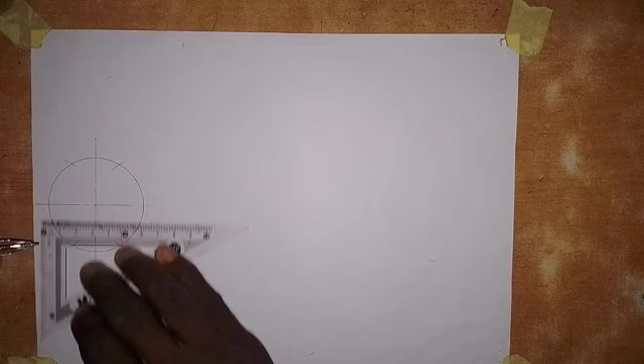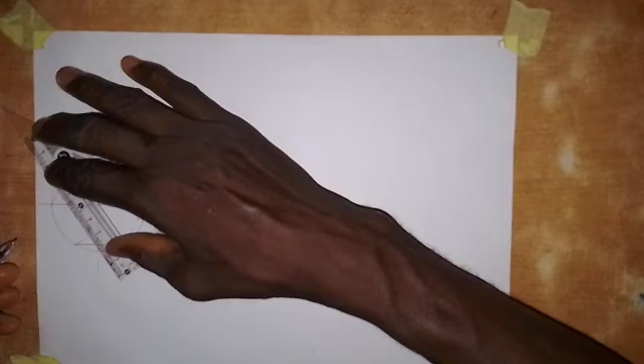Okay, so we join this point together, and we also join these 2 points together. So join this point together with this, and this point also we join them together. So join these 2 points together like this, and then these 2 points we join them together, and then we join these 2 points together like this.

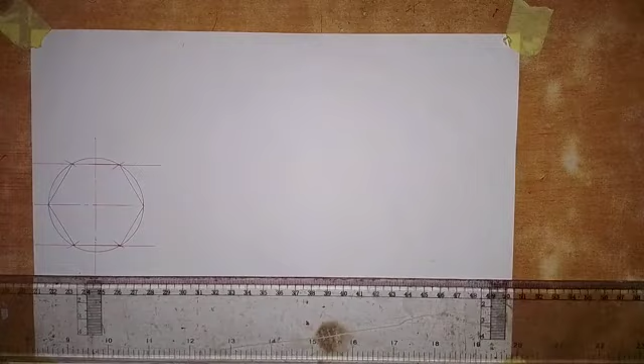Alright, so the next thing that we are going to do is to construct a square around this polygon. So to do that, we extend this line to both sides, and we also extend this line to both sides like this, and then we draw a vertical line through this point, and bring it to this side, and draw a vertical line through this corner of the hexagon. So we have this shape.

So what we are going to do now is construct a shape like this. So I'm going to label these points. This is point A. This point I will call point 1, and I'll call this point 2. This point I will call point B. This is point C here. This point I will call 3. This is 4, and this is 5. And then this point is point D, while this point I will call point 6.

Okay, so on the hexagon we have the numbers, while this may not be a square. I don't think it's a square. So we have it labeled ABCD. Next, we are going to construct a shape ABCD of this form, and we are drawing it in isometric. To do that, we are going to make use of our 30-degree set square. So we are constructing it on the 3 faces of an isometric figure.

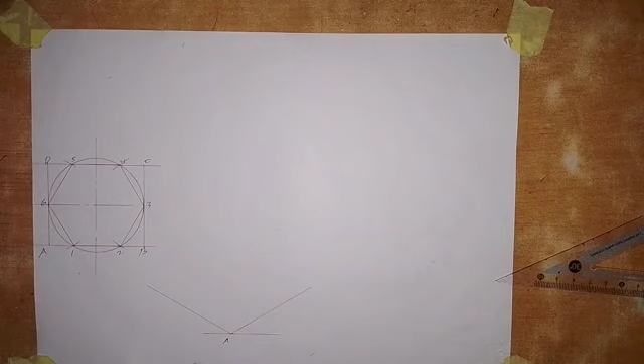Okay, so now I'm going to locate point D. So I will come onto this line. From here, use my compass to take this distance from here to point D. Taking this distance, I put it at point A, and then make an arc on this line like this. Okay, then taking distance from A to B, I put it at point A here and make an arc on this line.

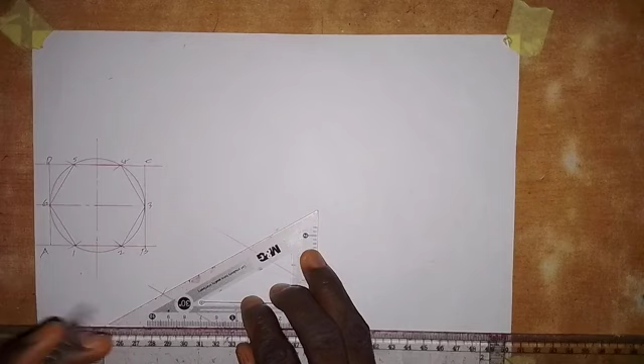Okay, so I need to extend this line, so we extend it here. And then the next thing that I'm going to do is draw a line from this point to this side, and then I will take it from this point here and draw a line from here to this point. All right, don't forget that this is point B, as we have it on this object, this is point D, while this point is point C. Okay, so that is what we have there.

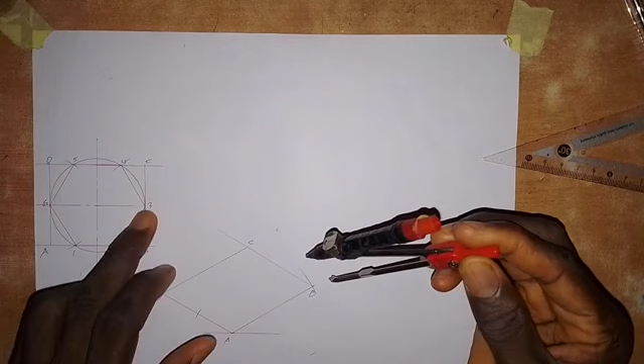So now we need to locate points 1, 2, 3, 4, 5, and 6 to construct an isometric hexagonal polygon. To locate point 6 and point 3, they are the same. All I have to do is take the distance from here to 6, put it at point A, and make an arc on this line. Then bring it to point B, because B to 3 is the same as A to 6, and make an arc here. So this is point 6, and this is point 3. Let's take note of that.

Then to locate points 1 and 2, I put the pinpoint at A, taking the distance of A from 1, and make an arc on this line. The distance of B from 2 is the same as A from 1, so I put it at point B and make an arc here. Also, the distance of C from 4 is the same, so I put it at C and make an arc. The same applies to D to 5, so I put it at D and make an arc at this point.

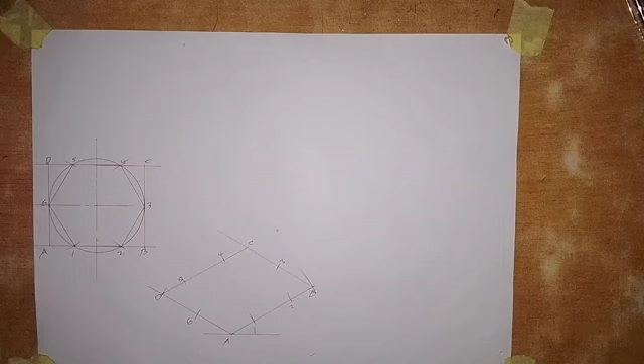So we have located these 6 points. This is point 1, point 2, point 3, point 4, and point 5, and we already have point 6. All we have to do now to produce an isometric hexagon is to join these points together. We are drawing this on the top face of an isometric object. So I will join 1 and 2 together like this, and then 2 and 3. This is going to form an isometric hexagonal polygon, drawn on the top face of an isometric block.

So if it happens to be an isometric block, we are going to draw it like this, as I've done it here. So we complete it now by joining point 5 and 6 together. So we have a hexagonal isometric plane figure now on the top face. Let's draw it on the left side face.

On the left side face, we are still making use of what we have done here. So on the left side face, we should be facing this side. What we have to do is to draw a vertical line. So we come to this side and draw a vertical line from this point, and then we turn it to this side. From any point here, turn it to this side, so we have this going in this direction. Okay, so we have it there.

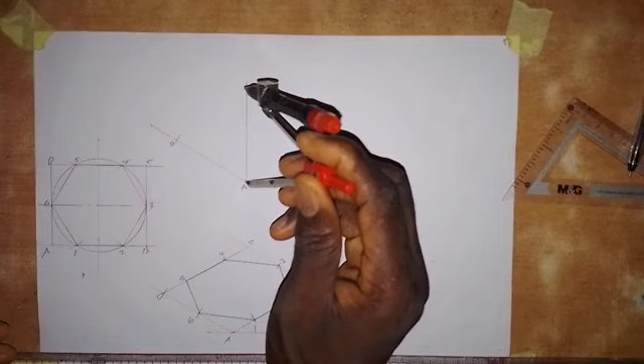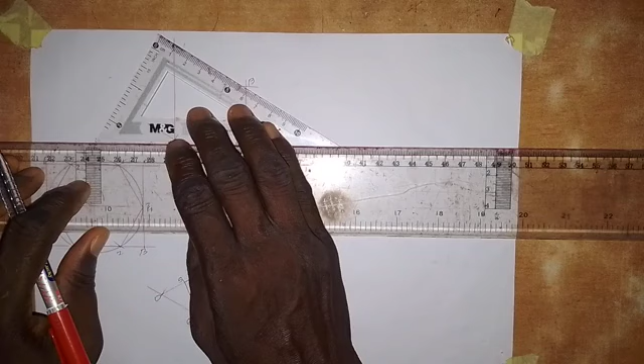Then we take distance AB to locate point B on this line, from A here. So this is point B; we write B here. Then with our 30-degree set square, to locate point C, we draw a vertical line from this point, and then we turn the set square like this, bringing it to point B. So take this point here. This point is point C now.

All right, so we now need to locate points 6, 1, 2, 3, 4, and 5. Point 6 is in between A and D. So just take this distance from A to 6, put the pinpoint at A, then make an arc. This point is point 6. And then point 3 from B is the same as that of 6 from A. So we put the pinpoint at B and draw an arc like this. This point is point 3.

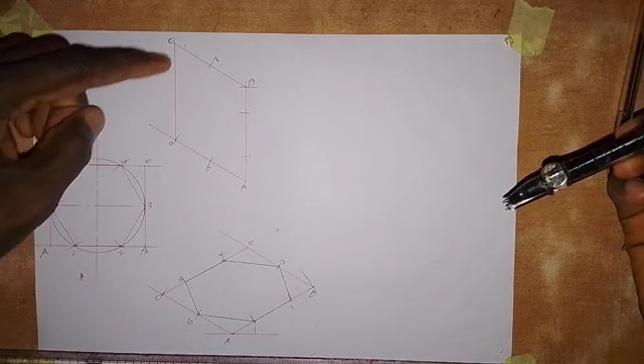Then we need to locate point 1. Take this distance A to 1, put it at A, and make an arc here. This is point 1. The distance of 1 from A is the same as distance of 2 from B, so put the pinpoint here and make an arc. And distance of 4 from C is the same as that of 5 from D, 1 from A and 2 from B. So put the pinpoint here, make an arc, and put it at D, and with the same radius make an arc. This is point 2, this is point 4, and this is point 5.

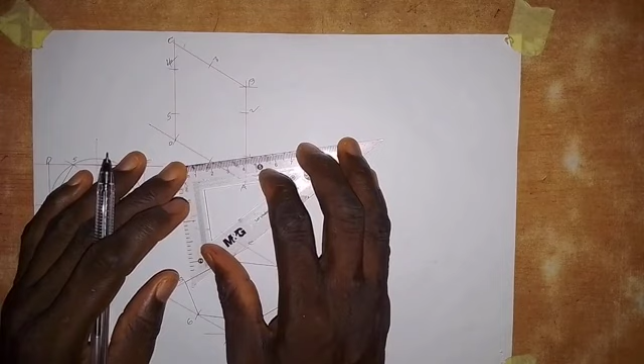So we just need to join these points together to get an isometric hexagon on this left face of an isometric object. We join these 2 points together, then we join point 2 and 3 together. Okay, so we have it like this.

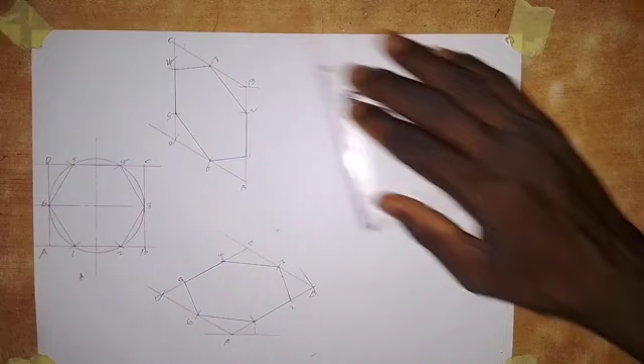Then join point 3 and 4 together. So we have this. Then we join point 4 and 5 together like this. And then we join point 5 and 6 together for us to have an isometric hexagon on this left face. So this is how we have it.

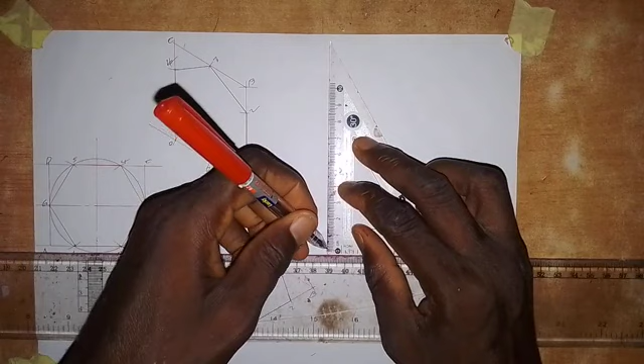Okay, let's look at that of the one on the right face of an isometric block. So we are going to produce it here. So what we have to do now is to come here. We first of all draw a vertical line. So here we have a vertical line. Then we turn the set square in this direction and we draw a line in this direction.

All right, so let's fix point A here. So here we have A at this point. Then we take a measurement of AD. For us to locate point D, we take this distance from here to here. We put it at point A here, then we make an arc on this line. So this is point D. Okay, so we have D at this point.

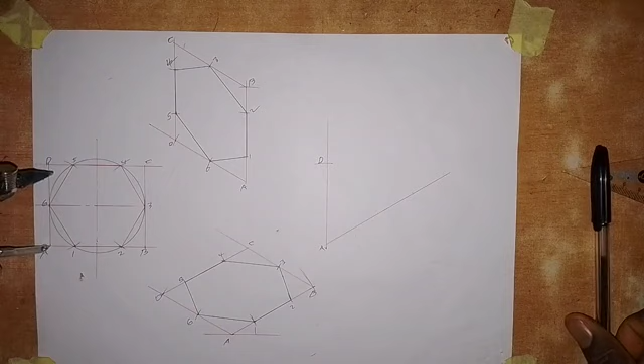Then we take distance of AB, so from here like this. Take this distance, put it at point A and make an arc here. So this is point B. Okay, so then we need to locate point C.

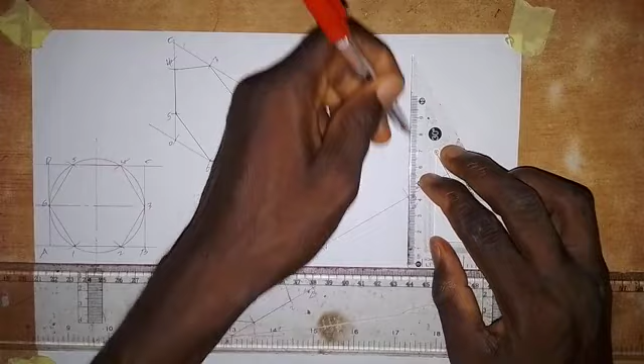For us to locate point C, we come to this point here and we draw a vertical line. We come to point B, we draw a vertical line here like this, and then we come to point D here. We set the set square in this direction, so we draw this line. So this point is point C.

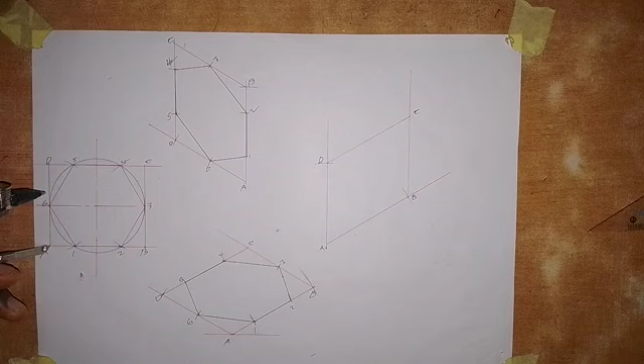So what we have to do now is to locate point 1, point 2, point 3, point 4, point 5, and point 6. And to do that, let's locate point 6 and point 3 first. Take distance A6 from here to here. Put it at point A here and make an arc here. So this point is point 6.

So here is point 6, and point 3 from B is also the same as point 6 from A. So with the same radius that we have used to get point 6, put it at point B here and you make an arc here on this line. So this is point 3.

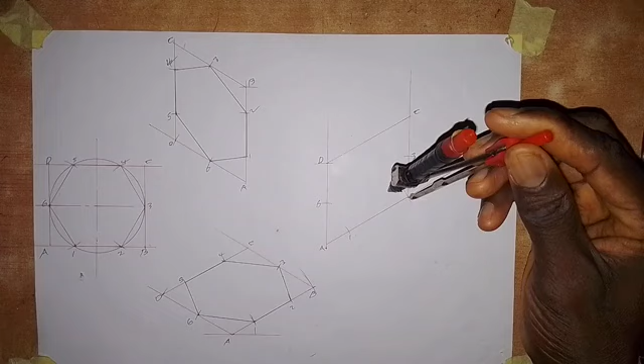Okay, so now let us locate point 1. We take distance A1 with the compass. So we have distance A1. Put it at A here and make an arc here. So this is point 1, and then the distance of 2 from B is the same as distance of 1 from A. So with the same radius that we have used to locate point 1, put it at point B here and make an arc on this line.

The same thing applies to that of 4 from C. We also use the same radius that we used to locate point 2 from B or point 1 from A, and then we also use it for that of 5 from D. So we have this point on the line. So this is point 2, this is point 4, and here we have point 5. So all we have to do now is to join these points together.

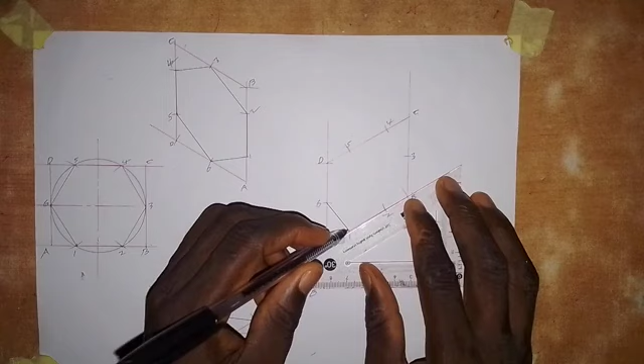So we join 1 and 6 together like this, and then we join 1 and 2 together like this. We join 2 and 3 together like this. Then we join 3 and 4 with a straight line. So it goes like this.

Then we join 4 and 5 together like this, and then we join 5 and 6 together. So we complete this hexagon on this right face of the isometric surface. As simple as I've done it here, all you have to do is to practice, and when you practice, become a master at this.